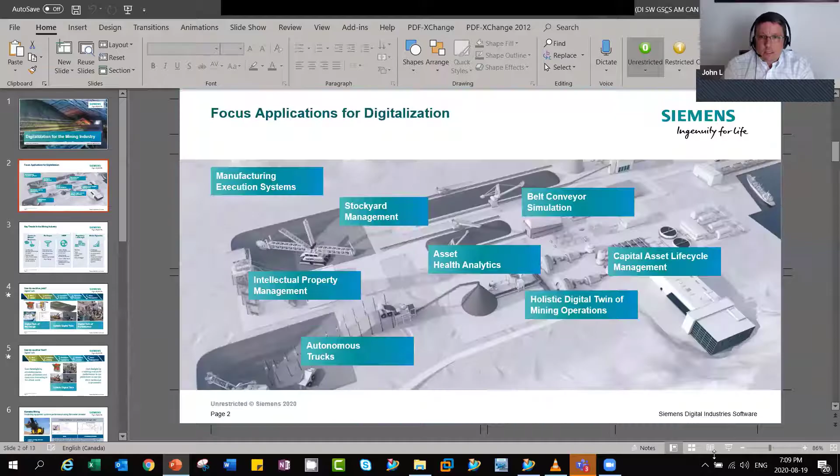So here we go. At Siemens, we get to work with many asset-intensive industries, and you'd be surprised at how much they have in common in terms of the challenges they face in developing a digital twin that mirrors and supports their physical enterprise. An engineering leader recently told me that my biggest problem is that my data and documents do not accurately represent what I see when I look out that window. Or maybe you're a design engineer or operations maintenance leader who is trying to understand what is happening inside that black box piece of equipment in order to make it work better or remain in service longer.

So the subject of digitalization for any mining or processing facility can lead to many different discussions, some of which we show here. It depends on the problem you're trying to solve, the target you're trying to reach, and honestly, the digital realities of your organization. And by that, I'm really referring to the level of digital maturity within your group or your enterprise, because it varies. My guess is that the organizations dialing in today are all over the map, because that's usually what we find.

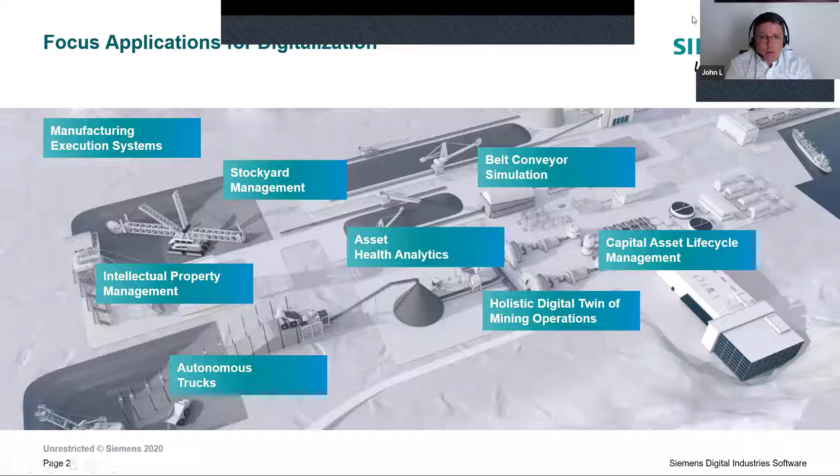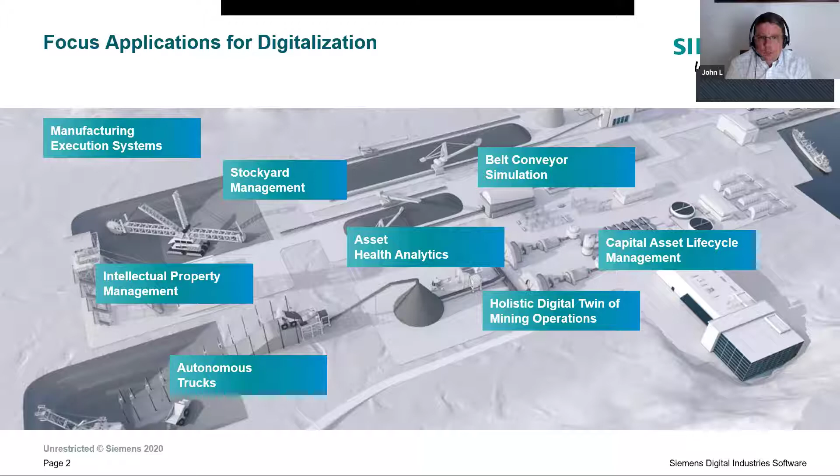And more, we believe that in order to effectively digitalize a mining operation, as with most other asset-intensive industries, by the way, taking a life cycle management approach to your capital and operational assets is the best way to build a sustainable foundation to your digital business that you can then build upon to support and innovate your physical assets. Next, Jithan.

As we begin, I want to very briefly touch on some of the key global trends in mining as we kick off here. So first, getting access to high quality mineral resources is becoming much more complex. And how we extract those resources is changing too, whether that means going deeper or changing how we operate once we get there. And as with every resource industry, HSSE, which stands for Health, Safety, Security, and the Environment, or what is now more commonly referred to as ESG, for environmental, social, and governance, is a criteria that companies must have a strategy for. And in lockstep with ESG, the regulatory environments are constantly changing and they differ by region, and not staying ahead of them can get very, very expensive.

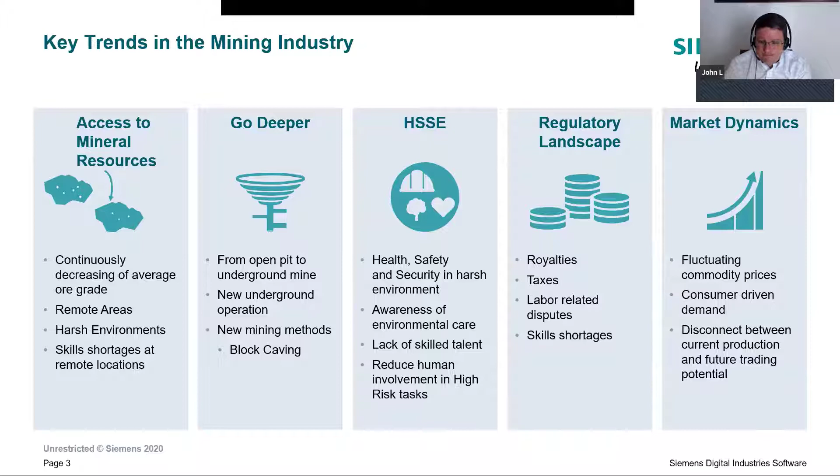And finally, market dynamics are all over the map and show no signs of consolidating anytime soon, depending on who you talk to. So in general, prices are pretty good now for metals. So the question becomes, how can digitalization help us capture a bigger slice of what's out there? Next, Jithan. So our conversation today is about the digital twin as it relates to mining.

This is a very short time slot, but I'd like to take you through a few key points. The first is that there can be different views of a digital twin. First, you have the digital twin of your design. This is what was designed, constructed, and handed over that you started with when you commenced operations. This is often the first wicked problem that an owner-operator has to overcome, and you need to have a strategy to deal with that, preferably before you start the new project, or perhaps a strategy on how to catch up for existing operations, if that's the case.

Next, you've got the holistic digital twin of what's really out there as of right now. And we all know that changes as soon as operations commence, so that's easier said than done. And lastly, you have the performance digital twin of your assets, plant, and processes. That's what's really happening out there in and around the pipes and vessels that are in operation.

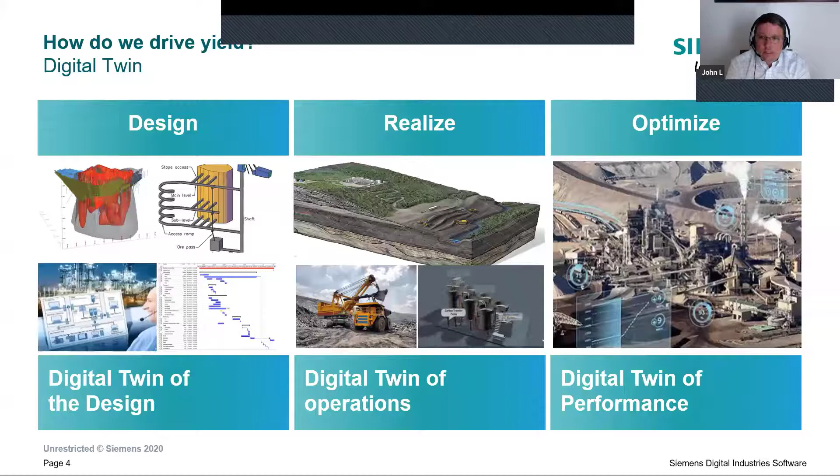It helps you understand how the digital twin and physical assets can be modeled and then optimized or improved to ensure a higher level of performance. So remember to keep in mind how to develop the digital twin of your enterprise and make sure that it supports what you're really trying to do.

There's one other key point that I'd like you to keep in mind, and that's taking a life cycle approach that ensures the different phases of your project and operations, such as mine design, operations planning, operations engineering, operations execution, and asset management, are all digitally interconnected, or they should be. And that information is available to your knowledge workers when they need it and in a way that they can consume it.

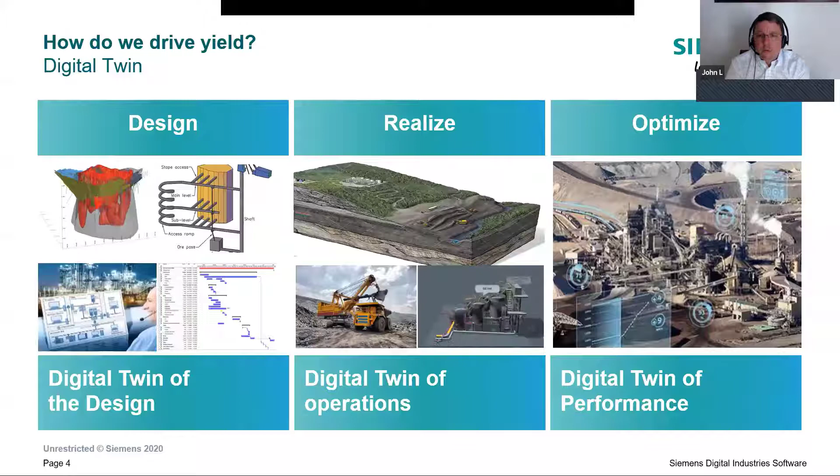So with COVID, we've seen that having the technical information supporting your operations locked up in your office, or even worse, in binders in the control room, makes it very hard to access when people can't come to work. Next slide, Jithan.

So in summary, it might take some planning to determine how you're going to develop a holistic digital twin of your mining operations, and that will depend on how you're going to use it. Today, it's more important than ever that you have a plan in place to make sure your operations run at peak performance and that your business is highly resilient so that you get through whatever's coming at us.

So now we can have a little bit of fun. We always hear that people like to see real-life customer examples of how the digital twin was used to solve a problem or help their operations. You'll hopefully remember the performance digital twin that I mentioned two slides ago. At Siemens, we love to talk about how we can use deep engineering to solve tough problems.

So now I'll hand control over to Jithan, and he'll walk you through two real-world examples that we thought would appeal to a wide-ranging audience like what we have today. So Jithan, I'll hand it over to you.

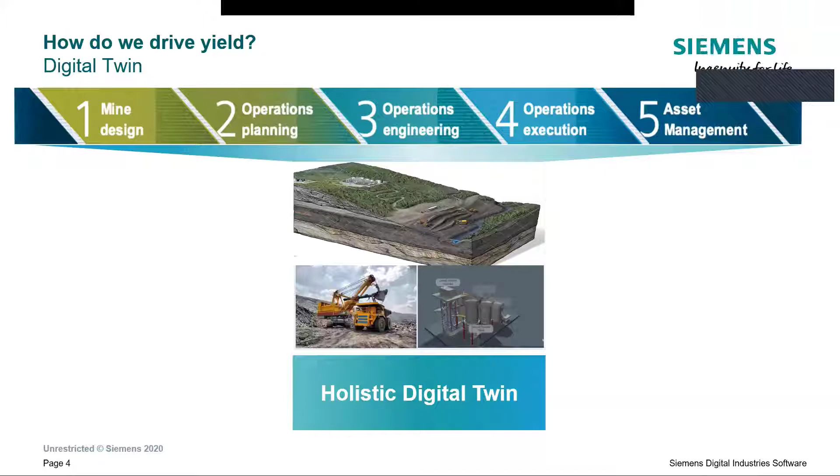Thank you, John. I think you can hear me? Yep, sounds good. Great. Let me go to the next slide.

Okay. Hi all, I'm Jithan Tellis. I work for Siemens Canada under the Digital Factory Division. Today I'm going to discuss two case studies, and at the end, I'll demonstrate a simulation of an underground mining facility. So let's begin with the first case study.

The case study is about the Komatsu Mining division. They provide large equipment for surface and underground mining facilities, for example hybrid shovels, wheel loaders, and so on. They have different equipment. This case study focuses on predicting the performance, fuel consumption, and finally the cycle time of large equipment.

During the early stages of development, Komatsu used model-based simulation system engineering to represent and simulate the entire system in a digital environment. What did this allow them? This allowed them to accurately represent the control system, subsystems, and hydraulic as well as electrical systems in block diagram fashion, and they were able to simulate.

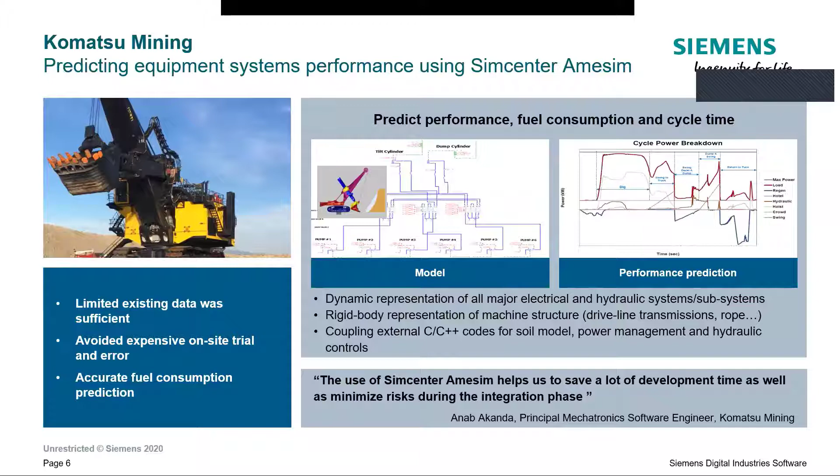To conclude, Komatsu used digital twin and simulation in early stages of development. This resulted in a drastic reduction in the development cycle. They were able to minimize the risks that would have happened in the future, so they reduced that and they increased the vehicle performance. So let me go to the next case study.

This case study is about a leading American industrial sand supplier. They're based out of Texas. They produce sand and coated sand products, which are used in various industrial and environmental applications.

They had an old plant, but they wanted to build a new plant efficiently. So the two key challenges that they were facing were increasing the throughput of the facility and reducing the truck delivery time. So to do that, the customer approached us for a new greenfield facility.

The data which they presented included plant layout, sand production rate, truck delivery schedule, processing time, and other variables related to the facility. Using this data provided by the customer, a digital twin of the facility was modeled. Once the modeling was completed, a simulation was run on the model using various input parameters and different conditions, for example, truck delivery schedule, the processing time of all equipment, manpower requirement.

So after that, they got the results. The results are divided in two phases. The first one is for the greenfield facility, which was not yet open, so it was in the planning stage. Let me go to the next slide. So the first stage result was that they were able to increase the throughput by approximately 31% and reduce the truck delivery cycle time by 61%.

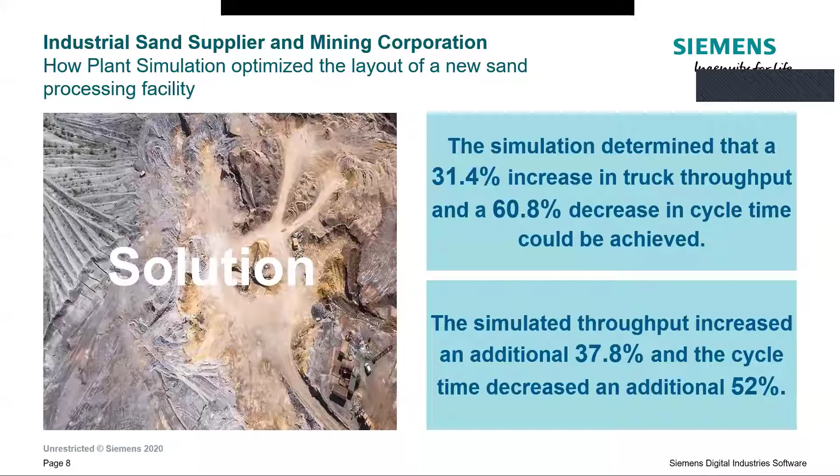These are not the only benefits. There are other key benefits that I want to quickly highlight. By reducing or eliminating bottlenecks in the line, they were able to increase the productivity of the facility. Second, by exactly determining the right resources required during the planning stage for the new facility, capital investment was reduced to a great extent. Output of the simulation produced right-sized inventory, thereby reducing the amount of inventory required, for example, raw sand and finished sand products.

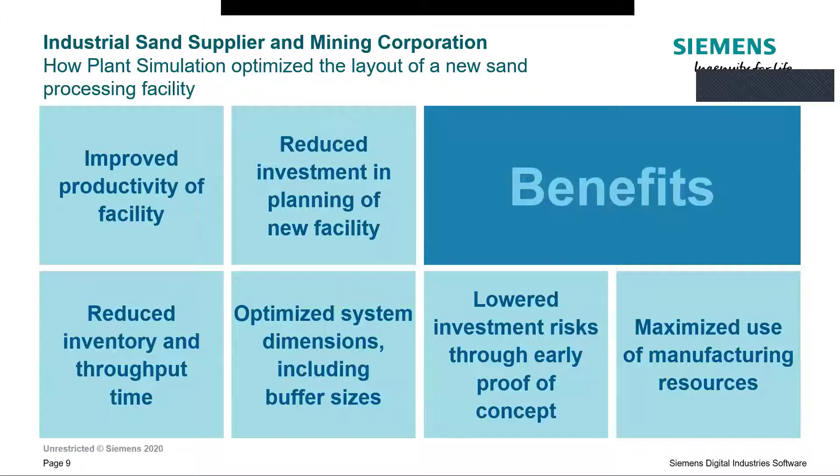A 3D layout representation helped them to optimize system dimensions, including the buffer sizes. By simulating various what-if scenarios, and this is a very important point, they were able to lower the investment risk at an early stage. Use of manufacturing resources such as workers was maximized using simulation. To conclude, all of these benefits are obtained by utilizing a true digital twin representing actual manufacturing conditions and a simulation environment.

I want to quickly demonstrate an underground mining facility. Let me switch my screen. We have a solution to simulate the digital twin. This was built for one of our Brazilian customers. It's an underground mining facility. So here we are interested in how each resource is utilized at different levels, and if there are bottlenecks, how we can eliminate those bottlenecks.

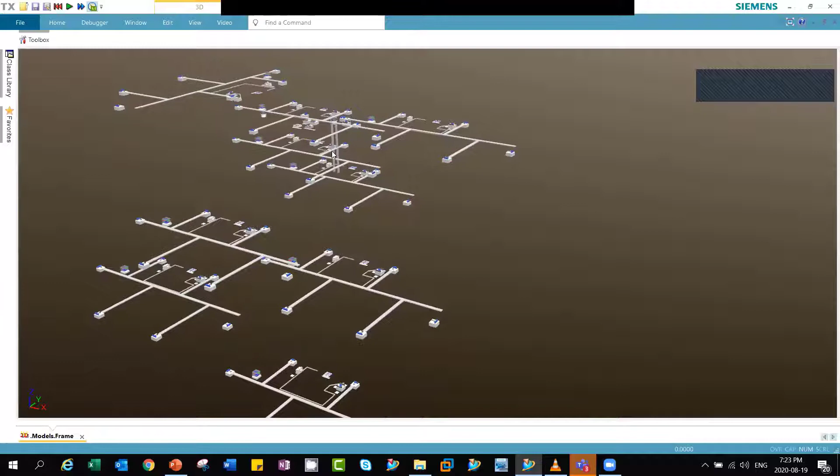If there are other issues which will not surface in the planning stage, we want to take care of them at the planning stage itself using the digital twin. This model has a multi-level structure. Each level represents multiple resources such as digging equipment, wheel loaders, workers, etc. Let's zoom into one of the levels. Here you can see the different levels and different equipment. Each level has different lines, and there are resources scattered.

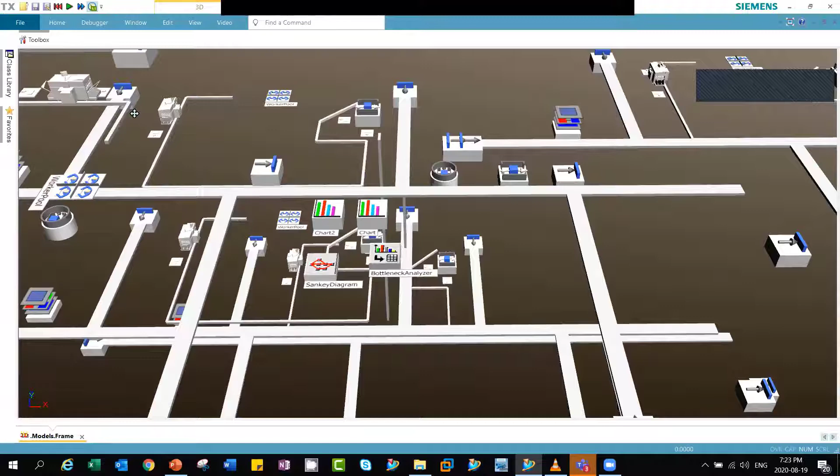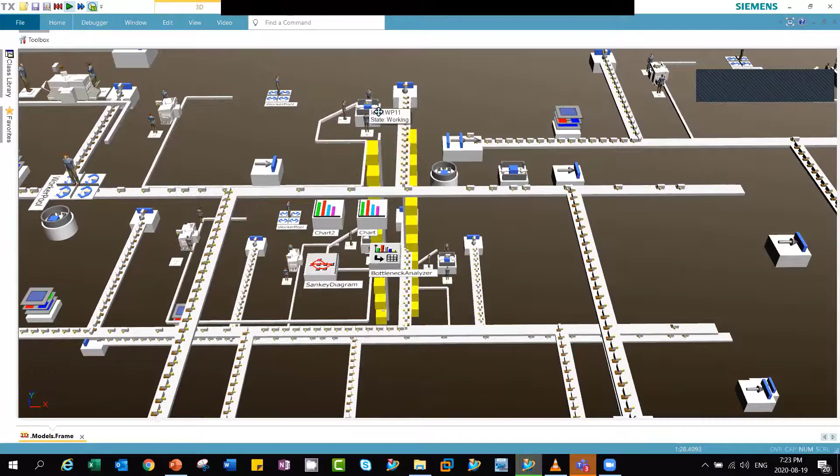So I'm going to fire up the simulation. As soon as I fire up the simulation, as per the plan, the workers are moving towards the resources, maybe to dig the minerals, and the minerals are being passed on to the different resources here, as you can see, and they are being processed. For example, maybe a crusher unit, a loader unit, a wheel loader, a digger, any sort of equipment.

Now the advantage with the simulation is it's running at the real time scale. I can increase the simulation speed just by dragging the cursor. With this, one year worth of simulation can be done in just 4 or 5 minutes. That's the beauty of the solution. Once the simulation is done or while it's going on, we can check different parameters.

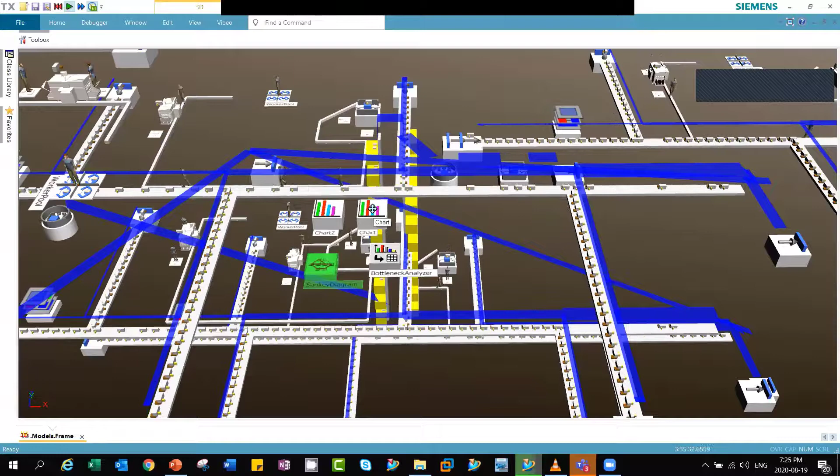Now we want to visualize how material flow is happening at different levels. To do that, I have a tool available here. I'll just say, show me. It shows how material flow is happening. The line segment thickness indicates the material flow density. The thicker the line, the more material flow; if the line is thinner, the material flow is less. So we can visualize where the traffic is more, where it is less, and whether I need any additional equipment to meet the demand.

Okay, let me go to the next section.

So there are various tools that can be utilized to check different parameters. The next parameter I'm going to show you is how we can see how each equipment is behaving, or the utilization of each equipment. So here is a chart. On the x-axis, the equipment names are represented. On the y-axis, percentage of utilization is represented.

Let me take an example of the first equipment or resource. That's level 3, line 32. In this, for about 85% of the time, the equipment is working, which is shown in green color, meaning the equipment is fully working. For around 15% of the time, the equipment is failed.

Whereas, let me go to one more example, level 1 and line 4, which has gray and yellow color. Gray indicates the equipment is waiting for the parts or the minerals from the previous station. And yellow color indicates that it's blocked for a certain time because the next station is not yet done with the processing, and the previous station is still waiting to send that part out of its station.

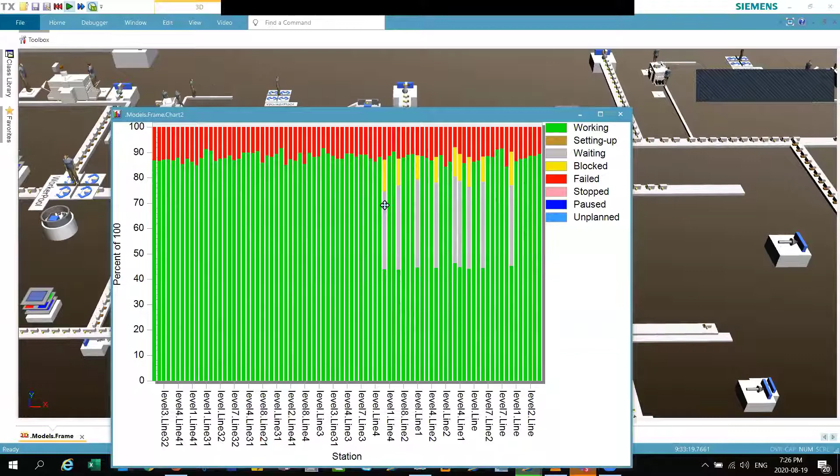So for around 15% of time, this machine is blocked, whereas for 25% of time, the equipment is waiting for the part. Okay. There are various tools, as I said. We can check the production rate. This is very important. As you can see, we have the ore production rate here.

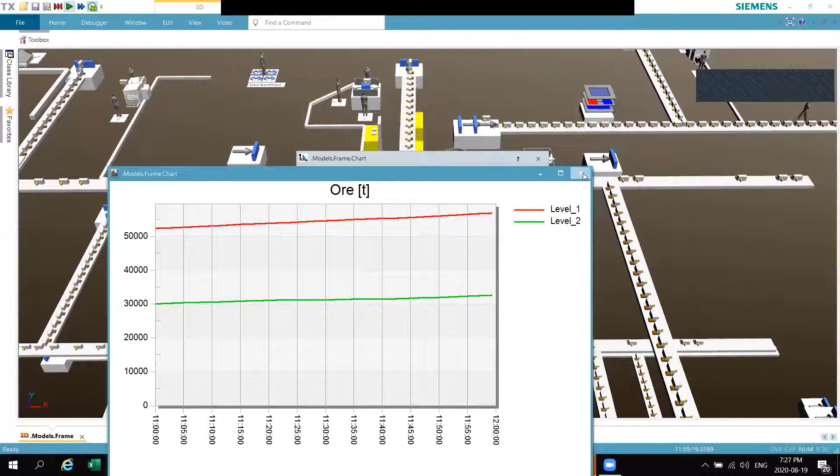Let me go to the next. We have a very important tool. It's called bottleneck analyzer. We want to analyze different bottlenecks which are happening in the line, and we want to take appropriate action on it. As you can see, we can have each individual equipment detail here, how much percentage of time it's working, for how much percentage of time it's failed, how much percentage of time setup is happening, or it's blocked or paused. Different criteria we can get to know.

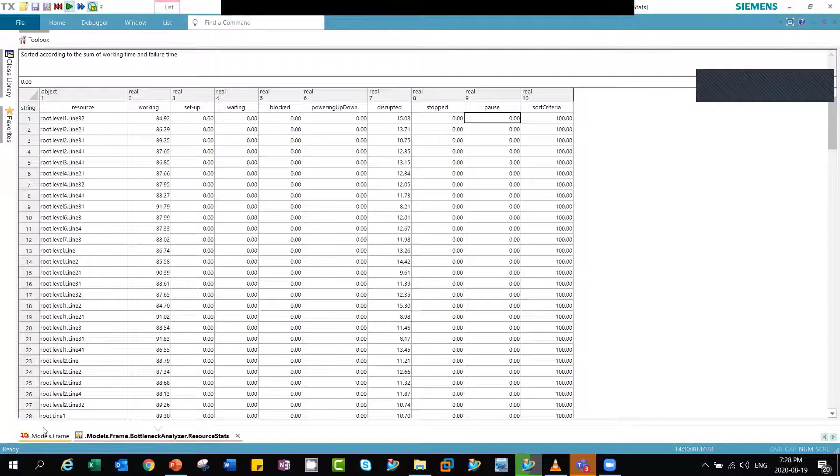Now, with this, what we can do is, even before we start drilling, we have all this information, we can take corrective action to increase the utilization of the equipment. If required, we can add additional resources to address the bottleneck requirement. If required, we can add additional manpower to have better utilization.

With that, let me stop and hand over to John. John, you're there? Yep, gotcha. Just had to unmute. Thank you very much, Jeethan.